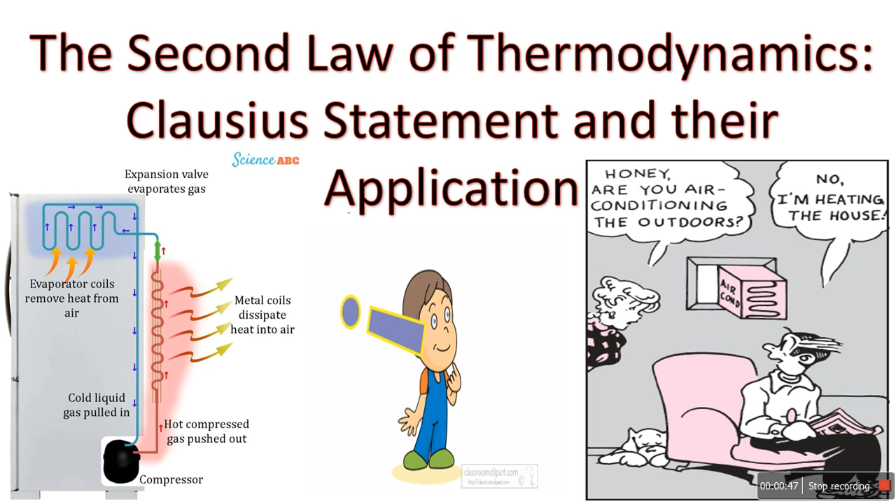See, the Clausius statement of the second law of thermodynamics is as below. It is impossible to construct a device such as a heat pump that operates in a cycle and produces no effect other than the transfer of heat from a lower temperature to a higher temperature body. The statement means that heat can't flow from the cold body to the hot body without any work input. This is very important.

We know that heat always flows from the body at higher temperature to the body at lower temperature. According to Clausius, to transfer the heat from lower body temperature to higher body temperature is possible only when we supply some external work. Only in that case is the heat transferred from the lower body to the higher body. This is the Clausius statement.

Spontaneously, we know that heat flows from the higher body to the lower body. I am going to revise. According to Clausius, heat flow from lower to higher is possible, but it consumes some kind of work input. Only then is it possible. Today we discuss the actual applications where we carry the heat from lower to higher, then you can understand this concept.

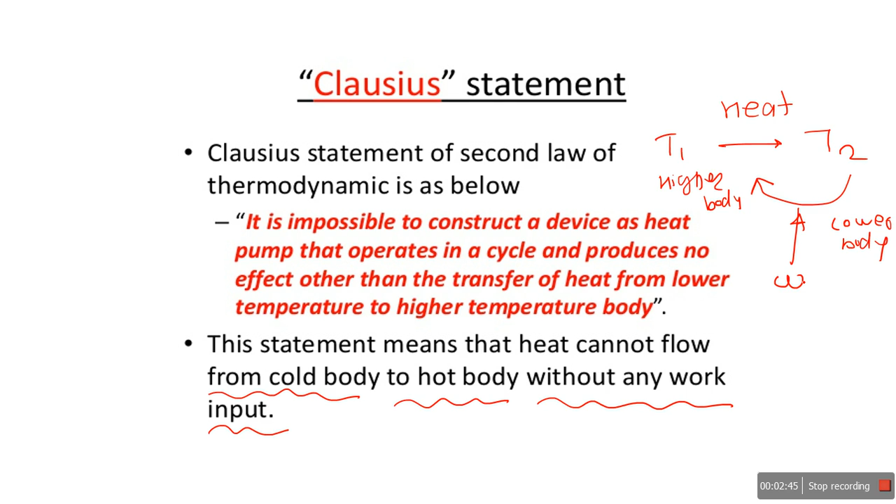Now I am going to represent the Clausius statement graphically. I am numbering the figures. In the first figure, TL is the lower temperature and TH is the higher temperature, and the heat flows from the lower to the higher. This is the system, and the figure shows the system is not consuming any kind of work. Without consuming any work, heat flows from lower to higher. But according to Clausius, practically this is impossible.

Now the second figure: the heat flows from the higher temperature reservoir to the lower temperature reservoir. There is no need for additional work. This is a spontaneous, natural phenomenon, so this is true according to Clausius. In the third figure, heat flows from the lower body to the higher body, but it is possible because the system is consuming some kind of work. So this is the correct representation of the Clausius statement.

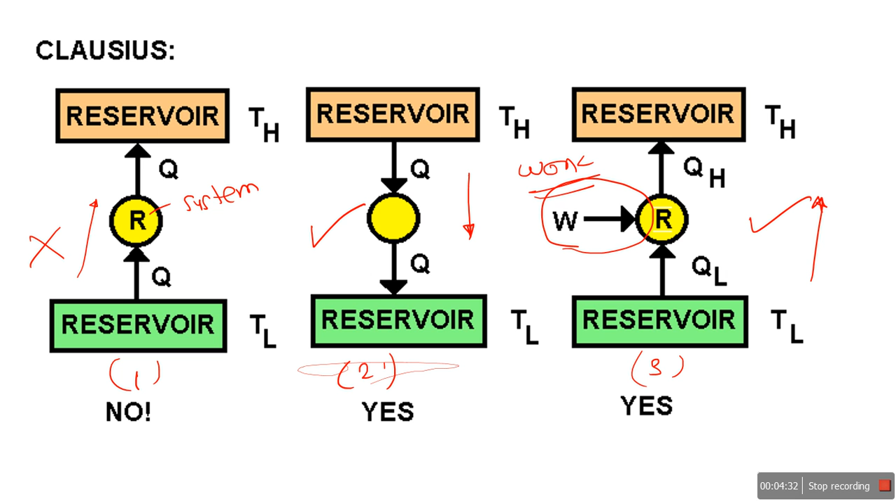So according to Clausius, we conclude these three statements. It is impossible to carry heat from lower to higher without external work. In the second figure, heat is carried from higher to lower; it's a natural phenomenon. In the third, heat is carried from lower to higher, but it consumes some kind of work. So I hope you understood the Clausius statement.

Now the first application of the Clausius statement, that is the refrigerator. In detail, there is one subject in mechanical engineering, RAC, refrigeration and air conditioning, where we are going to discuss it in detail. Today, from an application point of view, I just give its functionality and where it applies. This is the first application of the Clausius statement.

It is the refrigerator. It is also called a vapor compression refrigeration system, or VCRS cycle. V stands for vapor, C for compression, R for refrigeration, and S for system. It consists of mainly four components. The first one is the compressor, the second one is the condenser, the third one is the expansion valve, and the fourth is the evaporator.

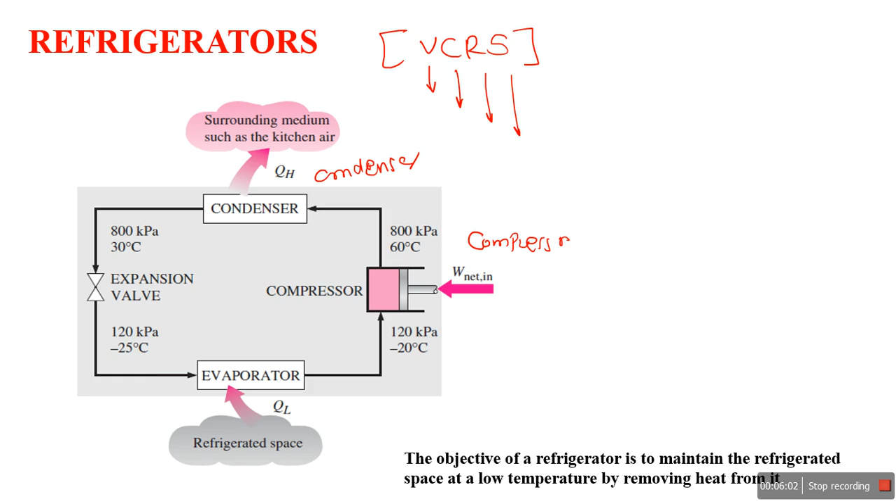Okay, the refrigerator is nothing but our domestic fridge. We see the refrigerator everywhere now, in every kitchen; that is the application which follows the Clausius statement. How does it follow the Clausius statement? Now you can easily correlate this domestic refrigerator with this cycle. I purposefully kept this image of the actual refrigerator in front of you, so you can easily correlate it with this cycle. I already told you there are four components.

The first one is the compressor. We know the functionality of the compressor. Here it compresses the refrigerant. See, in the VCRS cycle, the working fluid is the refrigerant, and this is not air. In RAC subject we go in detail. The working fluid is refrigerant.

The first role or functionality of the compressor: see here, low pressure, low temperature vapor refrigerant from the evaporator is sucked by the compressor. This compression is nothing but a piston cylinder arrangement. After compression it becomes high pressure, high temperature vapor refrigerant. This is the role of the compressor.

This is the hermetically sealed compressor at the bottom of our fridge, so you can easily understand this is the compressor. Now that high pressure, high temperature vapor refrigerant flows into the condenser. If we see the back side of our fridge, there are coils like that, connected from the compressor at the bottom. This is our condenser. If we touch it, we feel it is hot, because this coil is continuously rejecting heat to the surroundings.

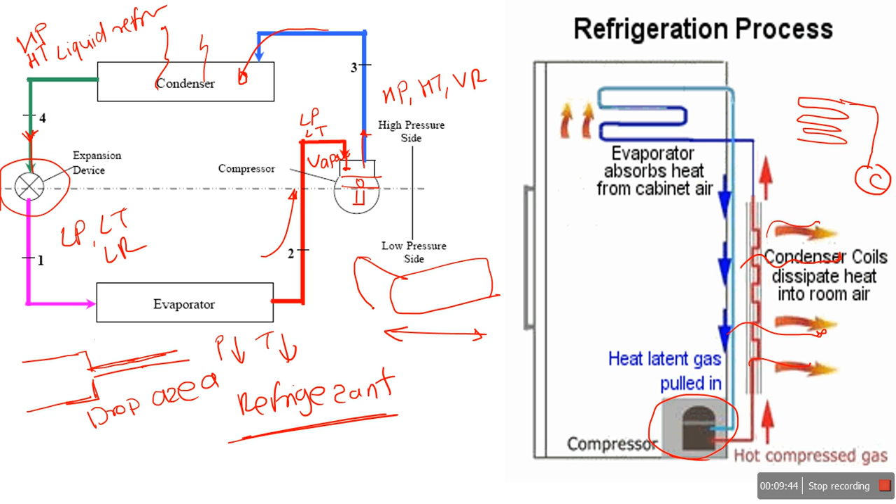Now the low pressure, low temperature liquid refrigerant goes to our evaporator. In the domestic refrigerator there is a freezer. If we see the compartment of our freezer, over that compartment this evaporating coil is wrapped. In the old type of refrigerator, we easily observe the coils wrapped around that chamber. Through that evaporating coil flows the very low pressure, low temperature liquid refrigerant.

The food content in this compartment has higher temperature, and we know heat always naturally flows from the higher to the lower temperature body. So that heat is absorbed by the liquid refrigerant flowing through the coil. This is indirect contact. The food is rejecting heat toward the coil, or the coil is absorbing heat. After absorbing the heat, the liquid refrigerant again becomes vapor refrigerant, so the compressor again gets low pressure, low temperature vapor refrigerant at its inlet. So the liquid refrigerant absorbs heat from that chamber.

Okay, and that liquid form is converted to again vapor, and this cycle is continuously going on. So I also discussed one question from the university question papers or autonomous question papers: the refrigerator is either open, closed, or isolated. Some students have written open. I don't know why it is open, because the same refrigerant is used again and again. When it becomes liquid, absorbing heat from our fridge, it becomes again vapor, and that cycle is continuously going on. So it is the same refrigerant, the same working fluid I am going to use. So it is a closed system.

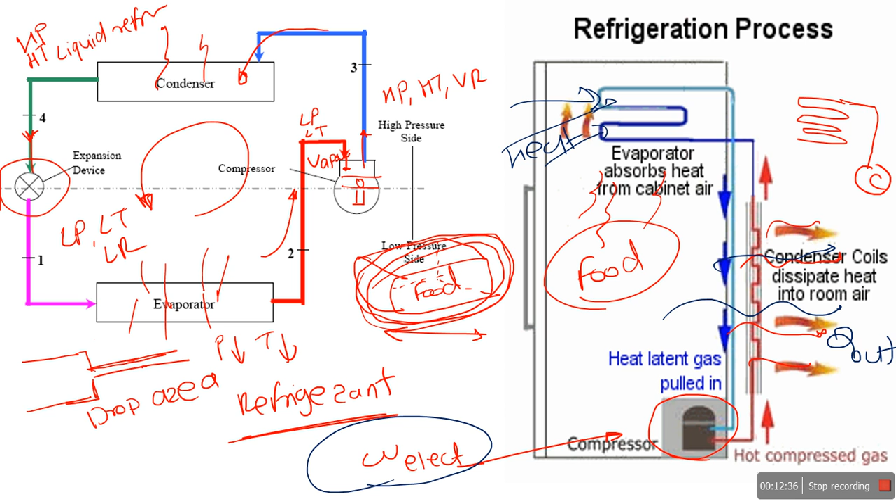Now I'm going to represent it diagrammatically, in the form of a block diagram. When I draw a circle, it indicates the system. In that system: the compressor, condenser, expansion valve, and the evaporator. What is the role of the evaporator? The evaporator is placed in our fridge, and it is absorbing heat from our domestic refrigerator. So the system means the combination of compressor, condenser, expansion device, and evaporator.

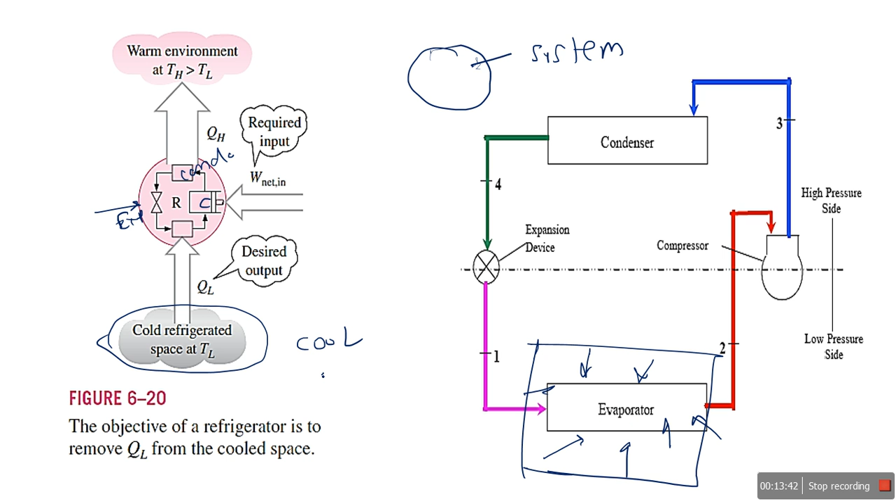For that system, what is the source? We designed it to absorb heat from the designed chamber in the fridge. The cold refrigerated space, where the evaporator continuously absorbs heat from that chamber so that the space becomes cool, is the source for that system. And after absorbing heat at the evaporator, it is rejected via the condenser. If you see the backside of the fridge, it is rejecting to the environment. So the sink, where the heat is rejected, is the environment for the domestic refrigerator.

In the next video, I am going to discuss the comparison between all three applications, that is, the comparison between heat engine, heat pump, and the refrigerator. Today's lecture I'm just discussing the domestic refrigerator application. So I hope you understand.

Now let us observe how it follows the Clausius statement. Clausius said that heat flows from lower to higher temperature, TL to TH, only if it consumes some compressor work. So heat is absorbed in the evaporator chamber, and the heat is rejected by the condenser. That flow of heat from low temperature to high temperature is possible only with the help of the compressor. So the compressor provides the work to the system continuously. So it follows the Clausius statement.

So it follows the Clausius statement.

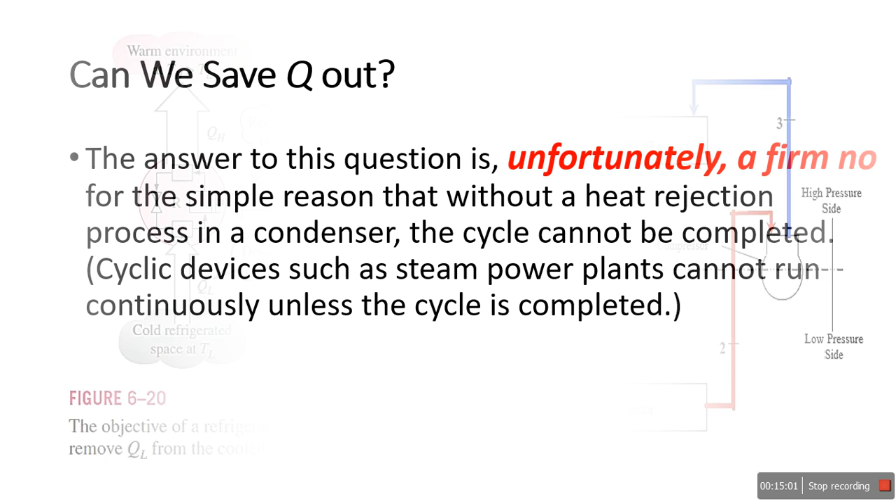Okay, can we say Q out is zero? The answer to the question is unfortunately a firm no. We can't. If you see here in the previous figure, there is a rejection of Q towards the condenser; via the condenser we are rejecting heat to the environment. If I am going to make the Q rejection zero, then how does the whole system move further, or how is the cycle going to complete? So it is highly impossible. In that case, we can't regain that vapor refrigerant as liquid refrigerant.

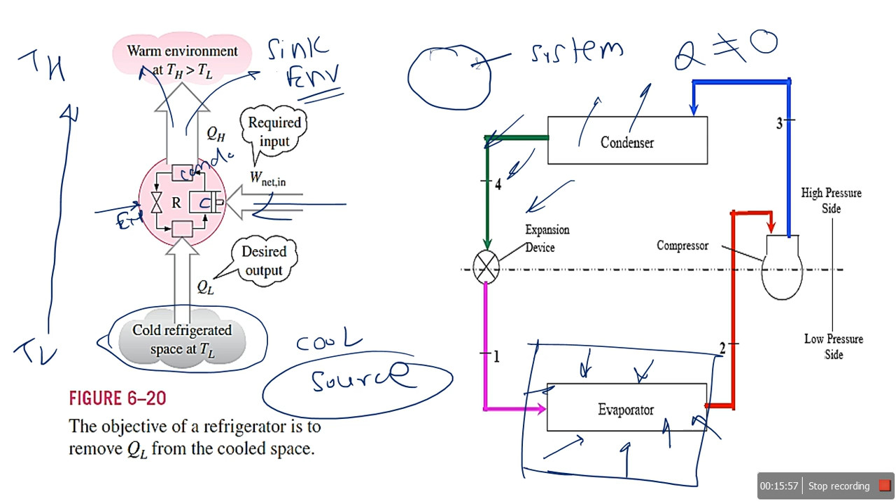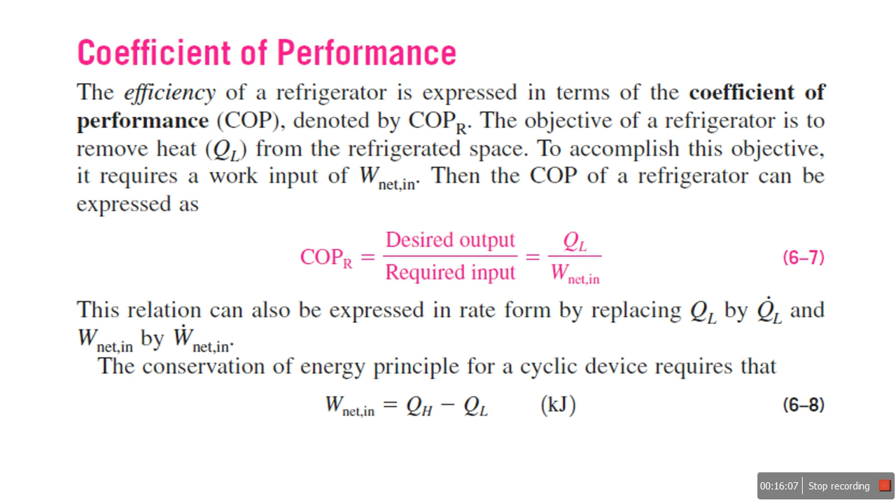In the case of the steam power plant also, if there is no condenser in the plant, then how do we convert the steam into water? So without rejecting heat, we can't get the original phase of that working substance, and if we can't get the original phase, we can't run the plant or the system. So if we keep Q out zero, it is highly impossible to run the system. Okay, before going to the next application, let's see how to measure its performance.

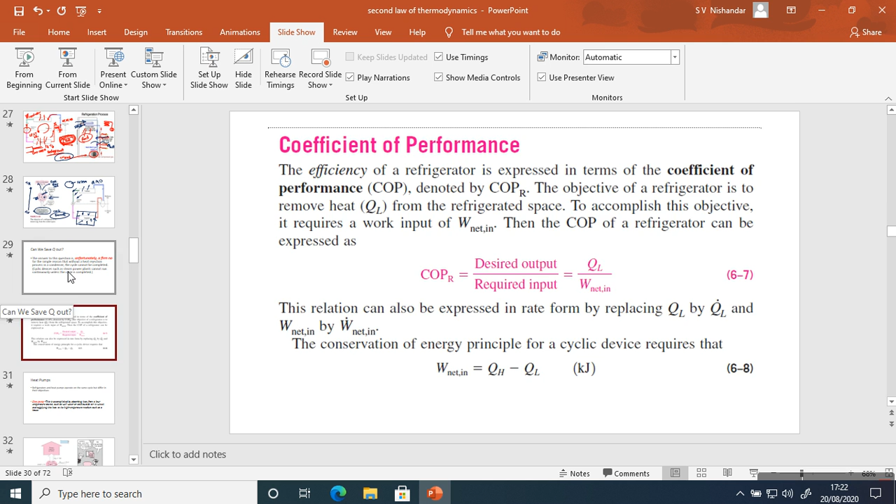Okay, now how to draw a block diagram. There is one system, and that system you call a refrigerator. Any system, according to the second law of thermodynamics, needs two reservoirs; according to Kelvin also we need two reservoirs. One reservoir is always at higher temperature and another at lower temperature. The reservoirs are classified as source and sink. And always remember, the source is not always at higher temperature and the sink is not always at lower temperature. It varies according to applications.

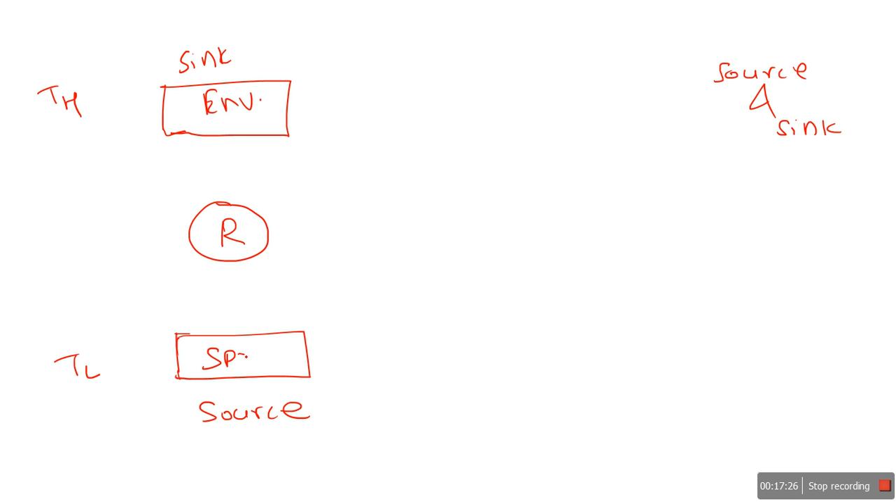So in the case of the refrigerator, what is the source? The source is at lower temperature, the space which is going to be cooled, and the sink is the environment. The sink acts as the environment, and the source is the space which is going to be cooled. This space becomes lower temperature because the evaporator in the system is continuously absorbing heat from the space, like a window AC.

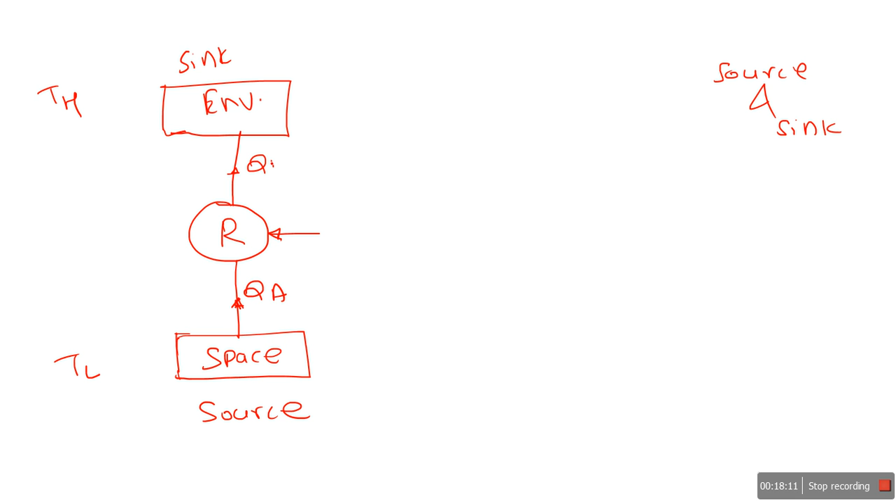Another application of the Clausius statement is the window AC, that is, the window air conditioning system. It continuously removes heat from the room and maintains the temperature; it cools the room. This is possible only if we remove the heat, so the space becomes cold because it absorbs heat via the evaporator, and via the condenser it rejects heat to the environment. This is possible only by supplying electric work, and this electric work is nothing but QR minus QA.

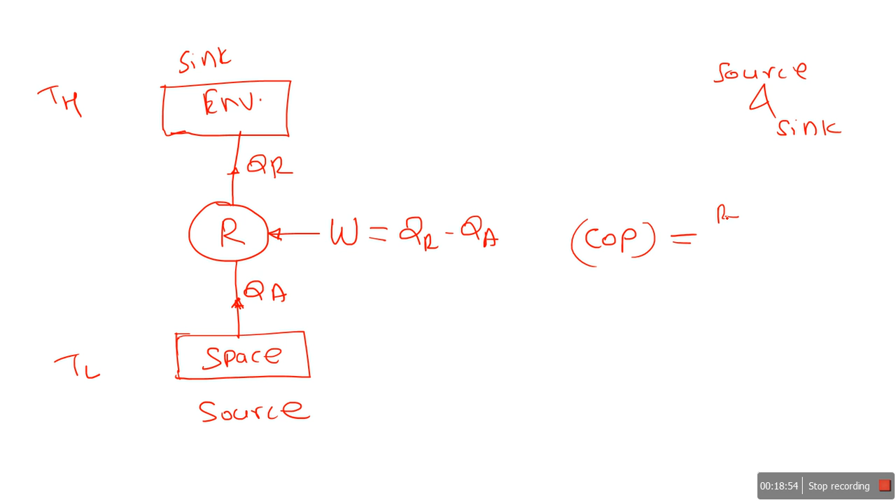Now how is the efficiency of the refrigerator measured? It is called the coefficient of performance, which is very important. In the case of a heat engine, the performance is measured in the form of thermal efficiency. In the case of a domestic refrigerator or window AC, the performance is measured as the coefficient of performance, COP, equal to output upon input. What is the purpose of a window AC or domestic refrigerator? The refrigerating effect, upon work supplied.

Now how much refrigerating effect do we get? Whatever amount of energy is absorbed by the evaporator, that much refrigerating effect we get. So the refrigerating effect is QA. The work supplied is QR minus QA; that gives the coefficient of performance for the domestic refrigerator. In terms of temperature, QA corresponds to the low temperature, written as T2, and QR minus QA is written as T1 minus T2. You can also write it as TL upon TH minus TL.

These are very important. In further videos, I'm going to discuss a few numericals so you can correlate these applications in day-to-day life. Hope you understood the Clausius statement and its application to the domestic refrigerator. In the next video, I'm going to cover the heat pump. Hope you understood. Thank you.